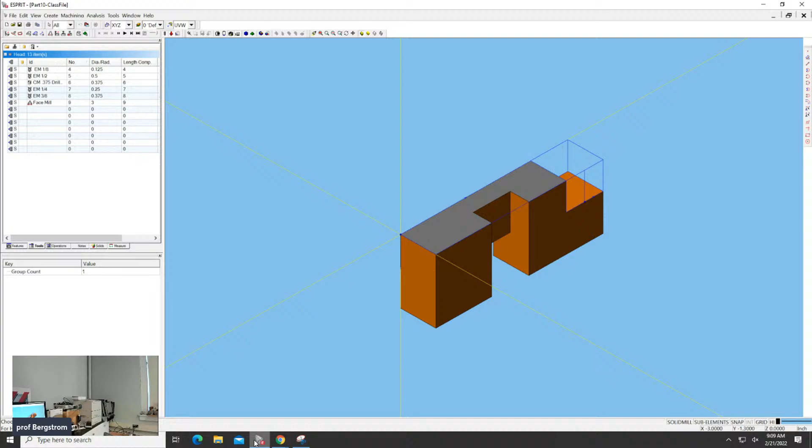So is the person who sent this file here? Oh, you are. You're in the back. Okay. With like the hood and the mask. All right. Now with just the mask, I recognize you. And once you spoke, I also knew that it was you.

All right, perfect. And so this is the ESPRIT file you sent. And you've got tools and stuff in it? Okay. I was just starting to look at it before you guys got here. So did you create stock material for this operation already? All right, so let's take a look at what you got for stock material. It's not on a different layer?

So you went to the simulations toolbar and here in solids, you created this stock. All right, so I can see the stock if I click the play button, even though there's no operations, right? So let me just go do that and double check where the stock shows up. All right, so the stock shows up visibly where the part is. So let me just double check and look at the definition.

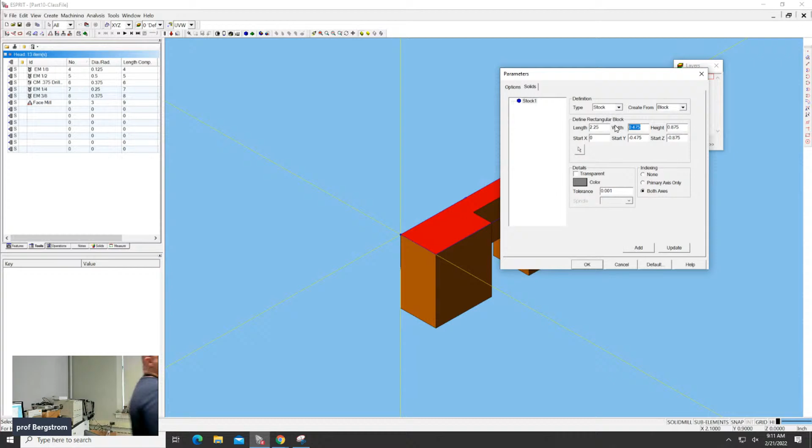So you made a 2.25 by 0.475. So do you have that piece of stock that you've measured? Was that thickness? But did you measure it? Do you know that it's that thickness? You do. Okay.

The first thing with doing the stock material is you need to define the stock material in the CAM software with exactly the same size and shape as it actually is going to be in the machine. That lets you do the programming and it lets you see if it's going to crash when it's doing the operations, right? All right, so it's 0.475 in width and 0.875 tall. Okay, and you shifted it down minus 0.875.

So the top of the stock is right here at the same plane where that red plane is, right? Which means we could do a facing operation there that would maybe touch the surface, maybe not touch the surface. It depends on how well we set the work offset, how well we set the tool offset, and how level the part was in the fixture. Does that make sense?

So often what I'll do is I will purposefully have the stock be a little bit taller than the workpiece, because when we set up the machine, it's easy to probe the top surface of the stock. And so the easiest way to do that is to actually shift the workpiece down a little bit in Z in the CAM software so that the stock is aligned with the top, and we're shifted down in Z a little bit.

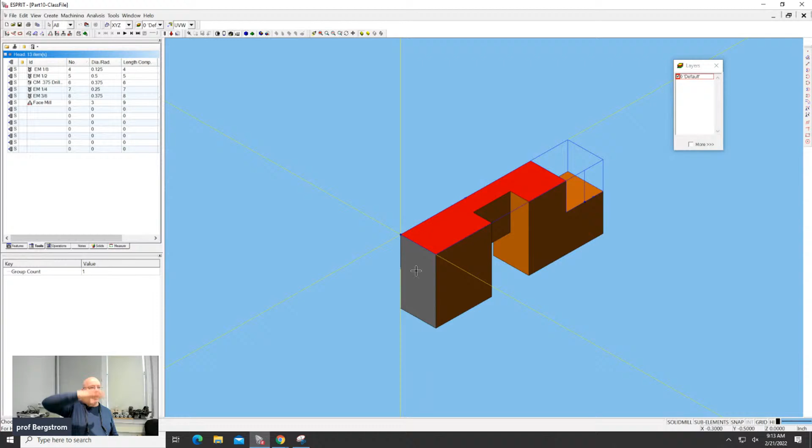The other thing is this plane right here. That's going to be lined up with that edge of the stock material also, right? So if we shift the workpiece down and right a little bit, is the stock material wider than the workpiece? What's the dimension from here to here? Do you know?

All right, so if we don't know what that dimension is, we can actually pretty easily get it. The first thing I'll do is quickly turn off sub-elements. And I've got highlight turned on. And now if I click this, it selects the whole part. Once I've got the part selected, I'm going to right click and say copy. Copy in ESPRIT doesn't just copy, it does a lot of different things. And what I want to use is this smash command, which lets me make a wireframe on the outside edges of the part. So it creates geometry features on the part.

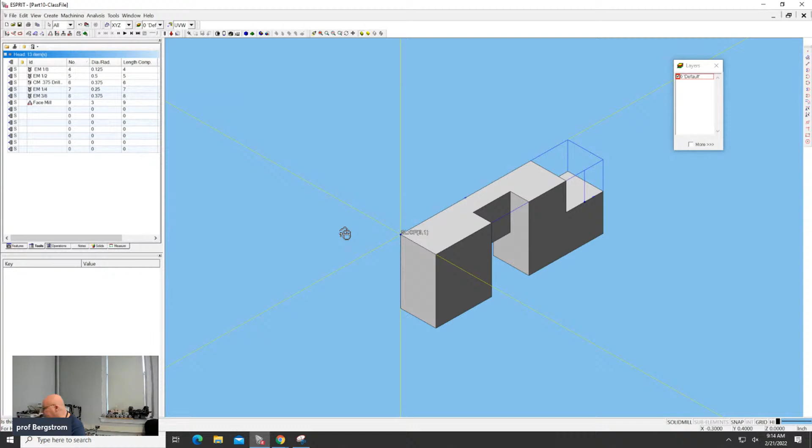And so if I do that, now if I have highlight selected, I can click here and it says, hey, is that the feature you wanted to select? And it's calling this line S1. If I left click, I say, yeah, that's the feature I want. If I didn't want that feature, if I right click, it gives me the next option that it found, which is the solid. And since I don't want the solid, I'm going to right click again, just right click until everything goes away there. And then I'm going to go here to that S1.

And so when I have it selected, if I've got the properties window open here, and you get that by going view, properties, when I select the line, I can see the length is 0.475. So it's exactly the same width as the stock material. There's nothing I can do with the position of the part front to back in this view. But I can move it down and I can move it to the right. So we're going to machine on both edges of it, I think. How long is your part?

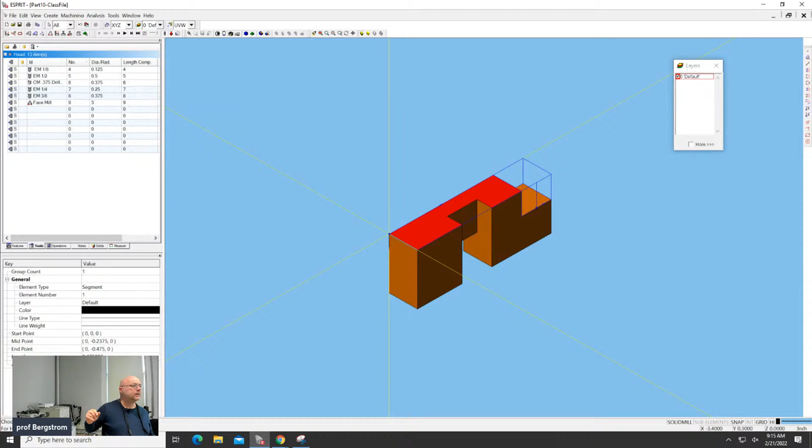Okay. So the other thing we can do here is we could measure, or we can, so we know that this line right here is on the 0, right? It's lined up with the z-axis. So we select this line right here. We can see what the x coordinate is. So x, y, z of either the start or the end point, right? So it's 2.25. I don't remember what your stock definition was.

So let's go back to that. So your stock is 2.25, .475, .875 tall. Cancel. That length is .875. So the part just barely fits in the stock material. So I guess we don't have to move anything because it just barely fits. And if that's the case,

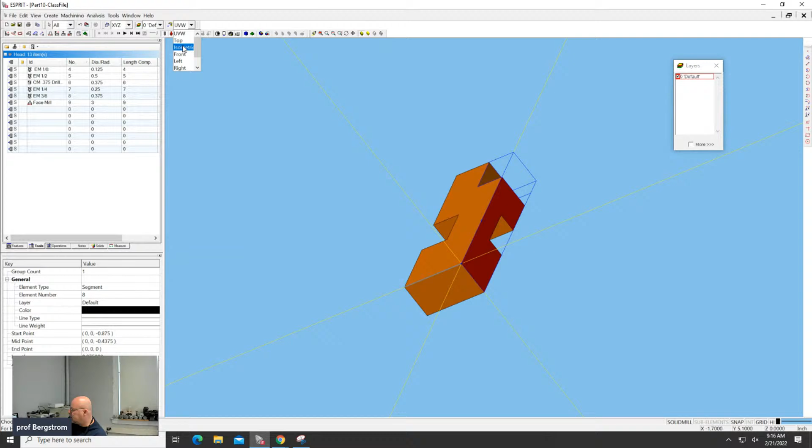then the only feature that we can make from this orientation with an end mill is this little shelf over here, right? So if I turn on sub elements here, we want to make that surface, right? From this orientation. And we want to make that surface from this orientation, because the tool could make a pass across there and do that. And so to do that, we really just need a contour path.

Go back to my isometric because it's easier to view for me. And so what I really want is a chain that goes from this corner over here to this corner over here. I can do that by going to the create features toolbar, and do a manual chain. And select this point here and go to this point here.

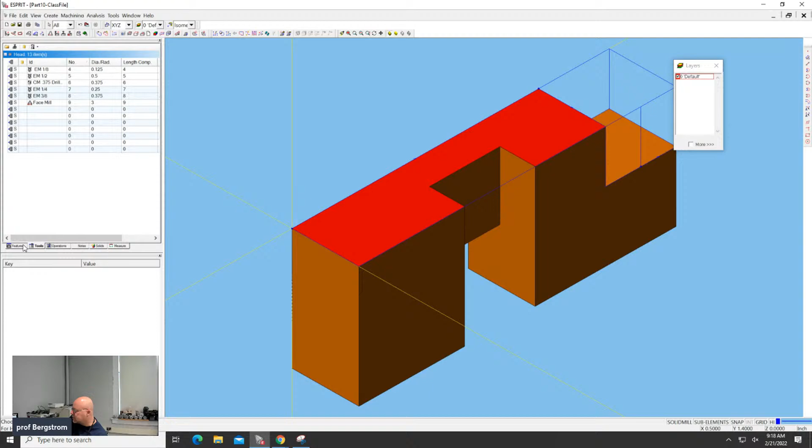Escape. I think I hit auto chain. I want to make a manual chain. Go from this point here to that point there. And then I got to tell it I'm done selecting points, so I'm going to hit the stop button here. And so we go to the features view. That was this chain that I just created. You can see that it's highlighted here. I'm going to go ahead and delete the other two chains.

So this chain is here. And if we zoom in, you can see there's an arrow on the chain that points from here to here, which is the direction I selected it. And that arrow is important because it tells us the direction the tool's going to go as it does that contour. And we want to do what we call a climb milling operation.

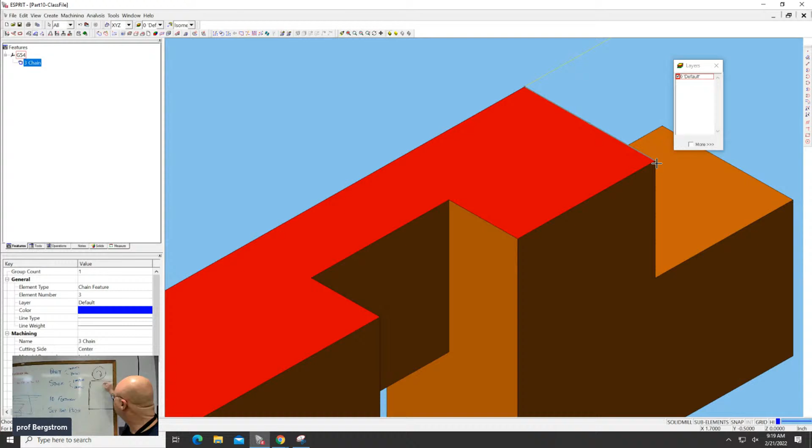And so when we do a climb milling operation, if we had the edge of the part here, in the top-down view, and we've got our tool here, the tool is rotating clockwise. And so the rotation of the tool will tend to make it roll along that surface that we want to make. And so this edge of the tool, as it climbs along that surface, is going to make that surface here. And then the bottom of the tool is going to make this surface down here, right? Okay.

So we've got our chain. I guess you started with one of our templates because you've got all the tools defined here. So we're going to use probably this 3/8 end mill to make that feature there. Now, all we want to do is select the chain. I go to my solid mill traditional toolbar. I don't want to do facing, don't want to do pocketing. I want to do a contour. So I select contouring.

And then if I go to general here, the first thing you need to do is choose the tool when you're going to do an operation. So I'm going to pick that 3/8 inch end mill. And it wants us to select the feed and speed for the tool. So the speed is either RPM or surface feet per minute. The XY feed rate is how fast it's going to move in X and Y. The Z feed rate is how fast it's going to move when it moves in Z.

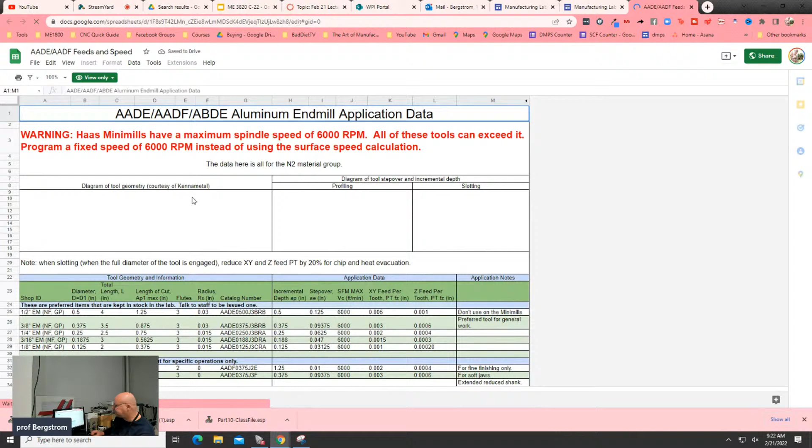We have a 3/8 end mill. So I'm going to go down to 3/8 here, and we don't need extra long or anything like that. So just the standard 3/8 end mill that we have here. And first it tells us what's the maximum diameter we could have with this tool engaged in the material, which is equal to the diameter of the tool. So that means that the tool can fully slot in the material. It tells us the total length of the tool, this AP1 max. It's how deep can the tool be in the material for each cutting pass.

And so what's it say? We want to go 0.875, so that's like half of 3/8. No. I don't know, 0.875. That's more than 3/8. Oh, yeah, AP1 max. Sorry, that's the total depth that it can go. AP1 is the depth that we want it to go, which is probably 3/8. It's incremental depth, AP1. There we go. Step over AE in inches. So we tell you that it can fully slot, but when you're using it, you should step over less.

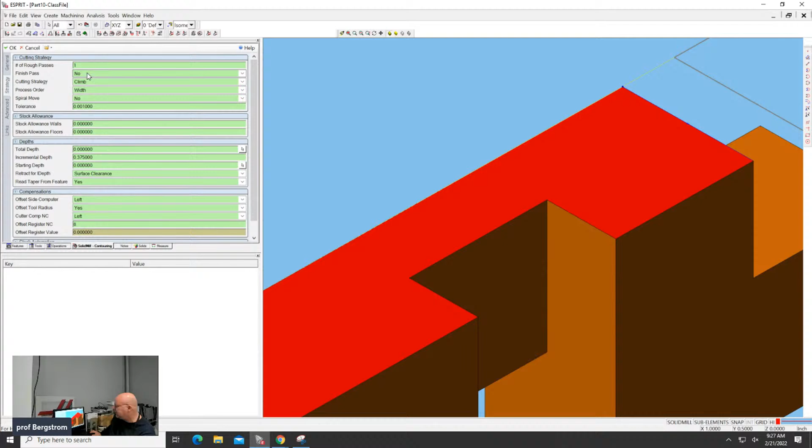This strategy here, so we're just cutting on one side of the part, right? So for strategy, we'll do climb milling. Number of passes. So over here, you remember it said that we want to step over this 0.09375. So I could take the total distance it needs to go and divide it by 0.09375 and calculate the number of passes I need to make. But I'm lazy, as all programmers are lazy. So I'm not going to do that. Instead, I'm going to just pick some number that I think is bigger than the number that I need. I don't know, 25.

And then I'm going to scroll down here and I'm going to say use stock automation trim. And when I scroll back up, it's going to say process order width. That's fine. Step over distance. So I'm going to do this 0.09375, which I got from the chart, which is 25% of the tool diameter. Stock allowance on the walls. We don't need to stay off the walls. If we use a positive number, it would keep the tool away from the surface. If we use a negative number, it would cut the tool into the surface and gouge it.

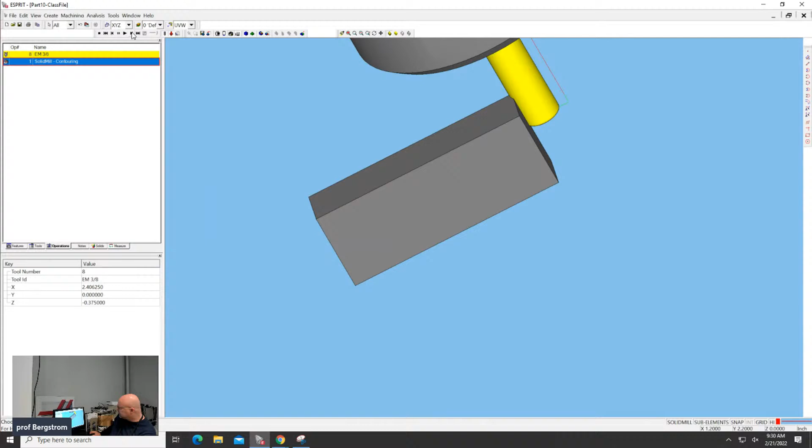And so what it's going to do now, if we simulate, so I'll single step through the simulation. So the tool's going to come in, it's going to take off that 09375, take off another one, take off another one, till it's done. When it's done like this, and so I think this is the part you're having trouble with mostly, the next thing we need to do is we need to say, hey, we're done with this operation.

And so what I'm going to do now is I'm going to click the save button. So it's going to save the file with all the operations and chains and everything that I created. Then I'm going to click the save button again because I'm not certain that I clicked it the first time. Then I'll typically click it a third time just in case I didn't click it the first 2 times. So now I'm pretty sure that I saved the file.

I'm going to go to my simulation toolbar. And I want to do save stock to file. So it's this one here. And so this is op1 finished, right? But in reality, it's the stock material for op2. So I'm going to call it op2 stock. And save it.

So I'll hit escape, get out of the simulation thing, hit stop to get out of simulation. So now I'm here. I got my tool path. I'm going to click save one more time just in case I didn't do it the last 3 times. And then I'm going to do file open. I'm going to make sure merge is selected. And I'm going to find the op2 stock that I saved today.

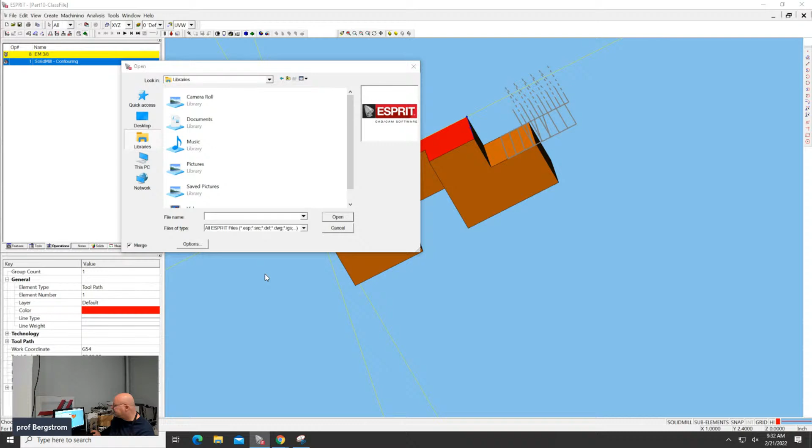Where did I save it? Quick access. Documents. Downloads. I don't see op2 stock here. Library. You know what? I don't know where I saved it. I'm going to run the simulation again. I'm going to do save stock to file. And I'm going to put it in the downloads folder because then I'll be able to find it. Op2 stock. Save.

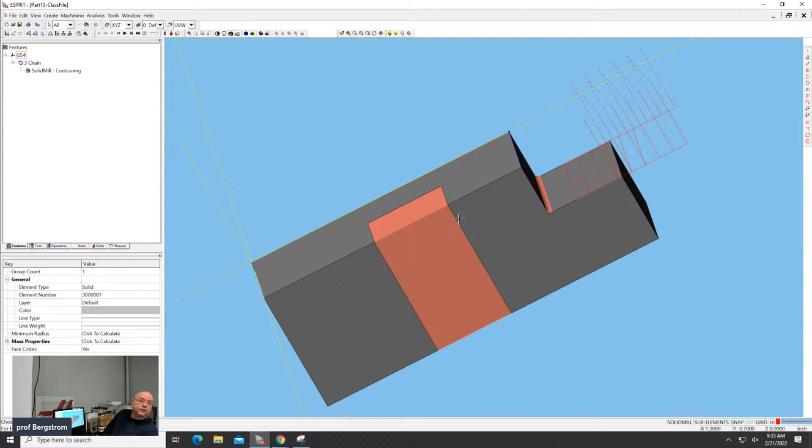Now I'm going to hit stop. File open. Op2 stock. I want to make sure merge is selected. And so now I just loaded in the stock that will be the part that you use for the next operation. We already saved it like 4 or 5 times, so I know that I saved the file that can create that. So I'm going to do file, save as. I'm going to call it whatever you called it before, op 2.

And so now it's got the stock material, it's got the part, it's in the wrong orientation, right? Because which operation do you want to do next? This one right here that removes this bit? Yeah. So if we do that one next, then we need to have this surface facing up, right? So the first thing I'm going to do before I rotate anything, we've already made the first operation. I'm going to delete this chain, and it will delete the cutting operation that was associated with it. Basically, I'm going to delete everything I don't need for the next operation.

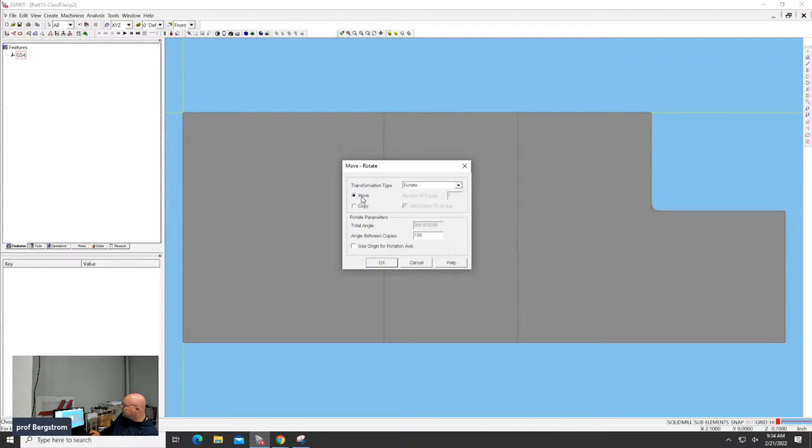Then I'm going to select everything that's left over. Maybe I'll go to the front view to make sure I get everything. I'm going to right click and move. I'm going to rotate. And make sure that it does not say use origin for rotation axis. And I'm going to make sure it says move, not copy. And I'm going to click OK. And it's going to ask me down here to select the center of rotation. I'm going to click that X axis.

And I'll go back to my isometric view because it's easier to see what's going on. Was that the direction we wanted to flip it? It wasn't the direction we intended, right? But it'll work. We can cut this one. So we'll do this side next. All right. So we're in this orientation. You want to remove this material here. The part's already exactly the right size, so you don't need to do any facing or contouring around the outside.

So to remove this material here, probably what I want to do is I want to make an open pocket. So to do that, I'm going to go to the Create Features toolbar again. And it's so easy to create a manual chain to 4 different points. So I'm going to just hit the manual chain.

Select this first endpoint. And so I'm there. Go to this endpoint. I'm there. Go to this endpoint. Go to this one. And go back here. And so now I've made a box that sort of represents that whole thing.

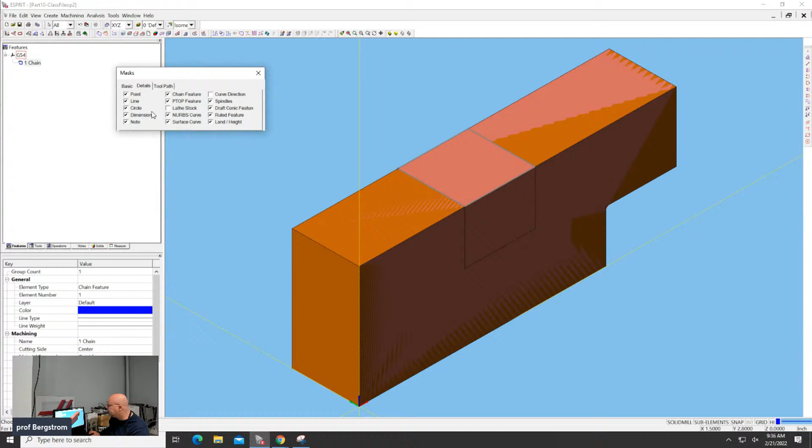In fact, I could have just the box showing if I go to View Masks. And I say, I don't want to see the STL model. That's the thing we loaded in, right? And I can say, I don't want to see the solid model. And so now I see all that geometry. And I see my box.

And that's kind of a pain too. So let me turn off geometry. And so now I just see that box. What I'd really like for the tool to do is to be able to go back and forth through this box and not be bounded by this edge here or this edge over here.

And so to do that, I'm going to make sure that I have highlight and sub elements turned on. And I'm going to select this chain, and it's going to say, hey, did you mean the chain that you clicked on? I'm going to say, no, I didn't mean that chain. It's going to say, hey, did you mean this element of the chain that you clicked on? And I'm going to say, yes, I meant that. So left click says yes, right click says no. So I want that element of the chain.

And we go back to properties, attributes, and say open edge, true. And then just click anywhere it accepts that. When it makes a dashed line like that, it means that it knows that it's a chain that goes all the way around, but that edge is supposed to be open. I'll repeat the process over here. True. And so now it's bounded on this side. It's bounded on this side, but it's open on those 2 edges.

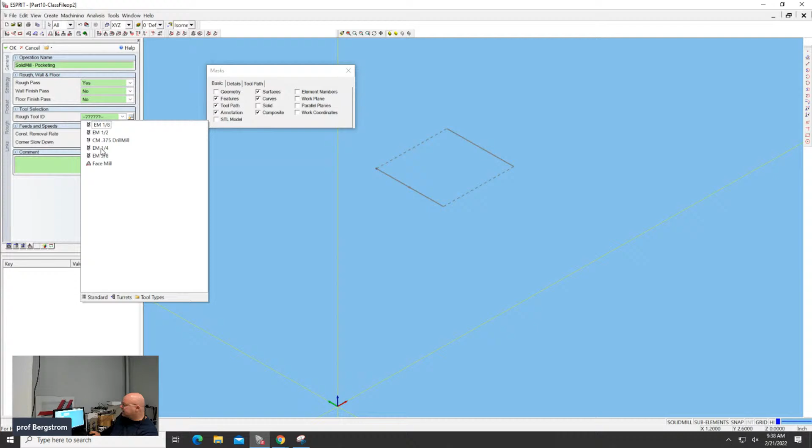We'll select our chain. Go to our solid mill traditional. And we're going to select a pocketing operation. Do you know how wide that part is? It's probably 375. Everything looks sort of the same. I'm going to go ahead and select the 1/4 inch end mill instead of the 375 end mill because it makes this explanation more interesting. So we've selected that 1/4 inch end mill.

Oh, 475. All right, so I can pick the 375 end mill, the same one we used before. The nice thing about picking the same one we used before is we remember what the feed, speed and depth of cut are probably, right? If not, we still have that tab open. But so general, we want to do a roughing pass.

I'm going to say no to the floor finish and the wall finish pass. What saying yes lets you do is, actually, I think it lets you pick a different tool and a feed, speed, depth of cut. But hey, this is not my project, it's your project. So I'm going to say no so I only have to program one thing. And I suggest that you guys only say no or only do one thing also.

Unless you find out when you make it that you don't get the surface finish that you want, and then you could adjust those things. But it's a pretty simple part here. So I'm going to say just do the roughing pass. Strategy. So there's all kinds of choices here. It's beyond the scope of this explanation to go into all the different choices.

But I like concentric out because it seems to me it starts in the middle and it moves towards the edges. And I feel like that's good. So I'm going to use concentric out. This morph move you can set to yes or no. Spiral you can set to yes or no for this operation. Doesn't really matter.

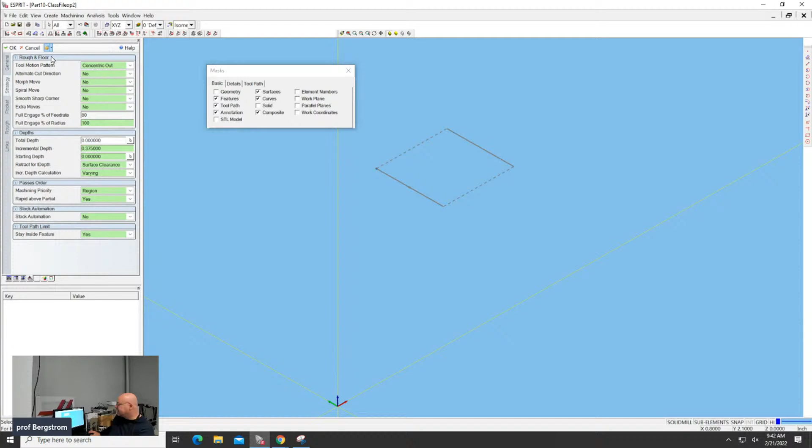Total depth. What's the total depth we need to cut to? Do you remember? I don't remember either. So let me turn the geometry back on. And if I rotate it a little bit, I can see where that shelf is. So I'll go ahead and select total depth. I want to go to, now I'm all confused. It's like one of those Escher drawings, right? I want to go to that point for my depth.

Total depth, incremental depth, starting depth. What was our incremental depth for this tool? Incremental depth is 0.375. Starting depth 0. I'm going to say stock automation, yes, again. We probably don't need it for this operation. Toolpath, stay inside feature. I'm going to just leave that alone.

All right, pocket. Are there any islands in your pocket? Any bits of material you want to leave in the middle? The answer is no. I've seen the part, but if there was something sticking up in the middle and you wanted to tell ESPRIT, don't cut that, that's where you'd click here and then you'd go select something over there. Read taper from feature is fine because there is no taper. Open edge offset. So how far past the part do you want it to start and stop? So I usually use this 110%.

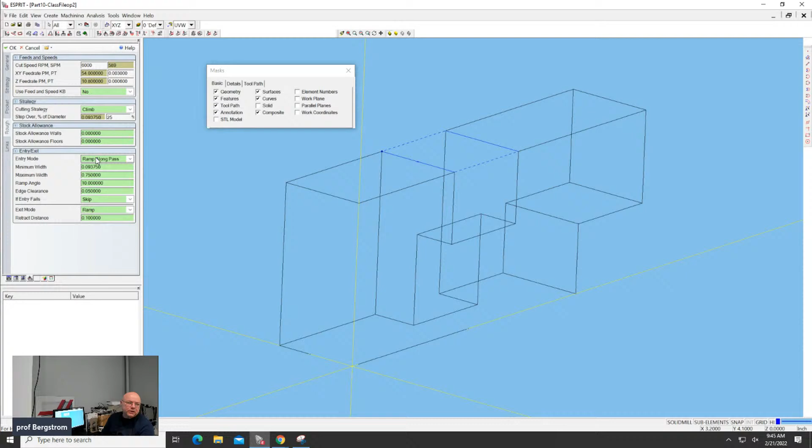Entry mode, because we're doing an open pocketing operation, we actually don't care what the entry mode says because it's going to come down outside the part and feed into the part. But if it was a regular pocketing operation, we would either want to use ramp along pass or ramp contained. We would want the tool to always be moving sideways when it's feeding down, never just feeding down. But we don't really care because it's an open pocket.

Links. This is really mostly important if you have multiple operations in a row that use the same tool. Since this program is only going to have one operation, we don't care what that says either. I'll click OK. ESPRIT could not find the area of the part to cut. Verify stock definition. Okay. So the problem is we loaded the stock file in, right? We've got it there. It's our STL model. That's our stock. We never told ESPRIT that was the stock.

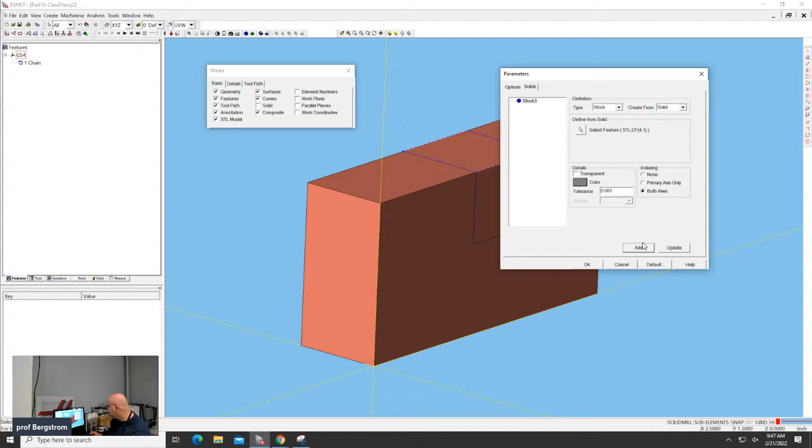So before we can have this operation, we have to actually go to the simulations bar, go to the simulation parameters, tell it the stock, and delete this one, the stock from solid. Select the feature, select the solid, add. Okay. Now, go to our operation, our pocketing operation. Select the chain. Go to our pocketing operation. If we're in luck, it remembers all the things that we put in. Let's just double check.

Nope, didn't remember anything. So 3/8 inch tool. Cut speed. Oh, it's a contour, cancel. Picked the wrong one. Select the chain and create a pocket. And 3/8 end mill. Concentric out. None of that stuff matters. 80%. Total depth, I forget. Click there. Starting depth 0. Stock automation. Trim. Stay inside feature, sure. Pocket. Nothing special on the pocket.

Rough. 6,000 RPM. 0.003. 0.0006. 25%. I don't care what this stuff is. Links, I don't care. Okay. And now we can simulate. And so now we've got two features on our part. Save, save, save. I'm a proponent of saving frequently.

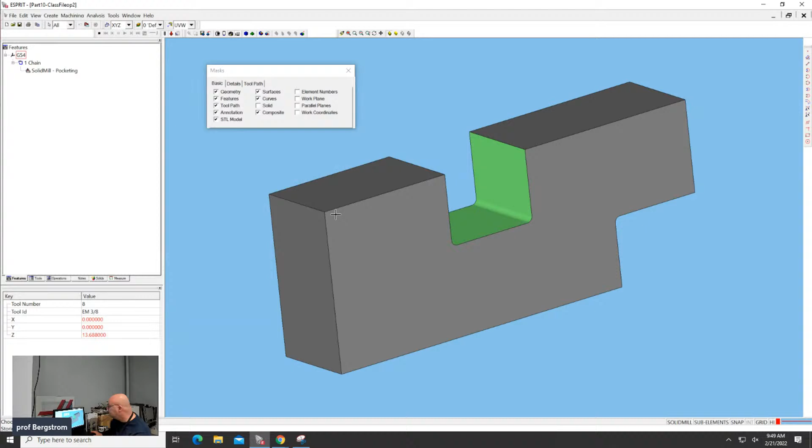Save the stock material to file. Op 3 stock. And it's in downloads. Okay, save. Yeah, sure. And file, save as. Op 3. Save. Hit stop. All right, so we want to delete this for Op 3. Delete this stock for Op 3.

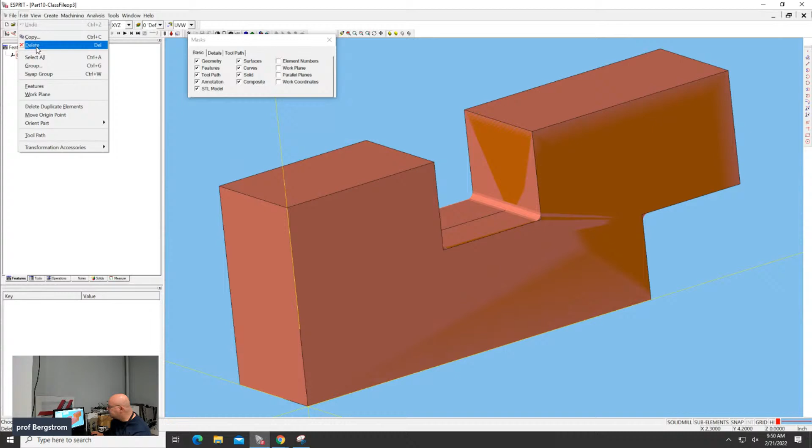File, open, merge, Op 3 stock. We've got that here. I'm going to remember to go ahead and set that as the stock now. So I'll go to simulation parameters, delete the old stock, new stock from solid. That's the one, add, okay. Turn on my solid. And I'm going to do edit, select all. Copy, rotate, move, 90, okay.

And put it in the right operation. And then just repeat those same, right? You're going to create this open chain the same way we did the last one. And you're going to have that same operation to remove this material in here. So actually, because you want to make the same operation, let's go ahead and make the chain first.

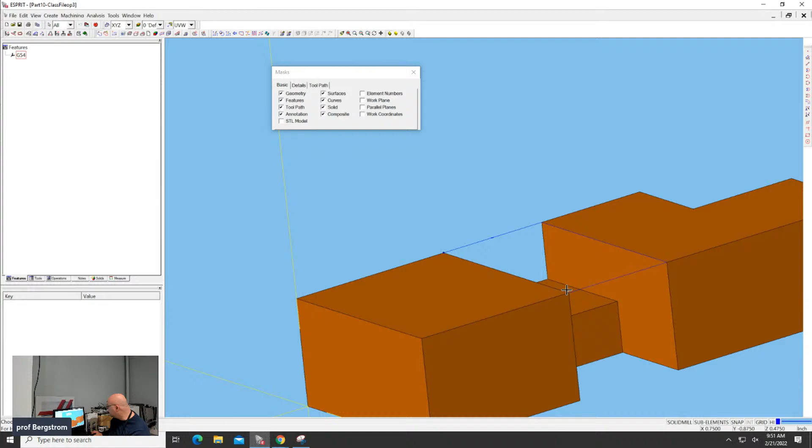So my manual chain, I'm going to do this one. Nope. Endpoint. Manual chain. This point, this point, this point, this point, and my endpoint. I want those two edges to be open. So select the chain, say nope. Yes, I want that one.

And then I'm going to hold down control. I'm going to select the chain. I'm going to say nope. I'm going to say yes, that one. And so I've got both of those selected. I can do attribute open edge true. And that makes both of those edges open. I'm going to do file, save.

Then I'm going to go file, and I'm going to reopen the last one we did, op 2, right? I'm going to open up op 2. I'm going to go to my operation. I'm going to right-click, file, save process. I'm just going to call it temp, save. I'm going to go back to the one I'm working on, op 3.

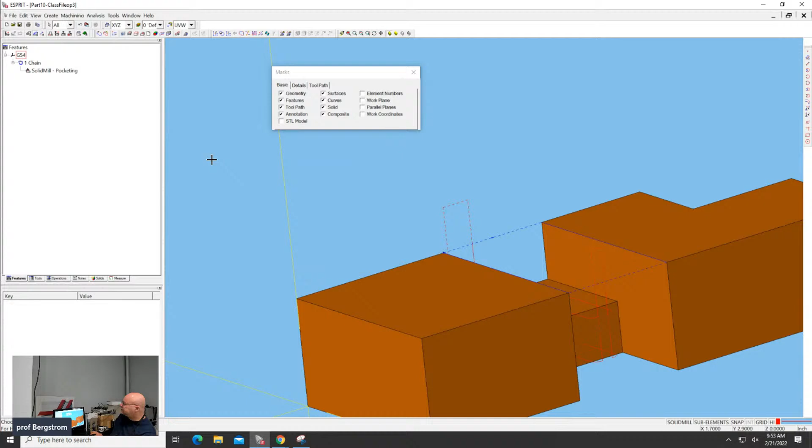I'm going to select the chain, right-click, file, open. Temp is the one I just saved. And so it copied all the parameters we set for the last one. We can simulate and see that it makes that cut too deep, right?

So all we do is go back to the operation, hit stop to get out of simulation, go back to the operation, find the depth part in strategy, total depth, and select that height instead. And so then it makes the feature like that. And then click save, save, save, and then we're done. So then we've programmed that part. It all used the one tool, take the stock material, flip it over, flip it over, flip it over.

Was that good? Has anybody else emailed me a file to look at? I did. I'm all set. Well, I'm not going to look at your file. That was the last time, right? Or Hayden fixed it? Yeah. Anybody else email me a file to look at? You can ask, but I didn't hear you, so let me walk over here.

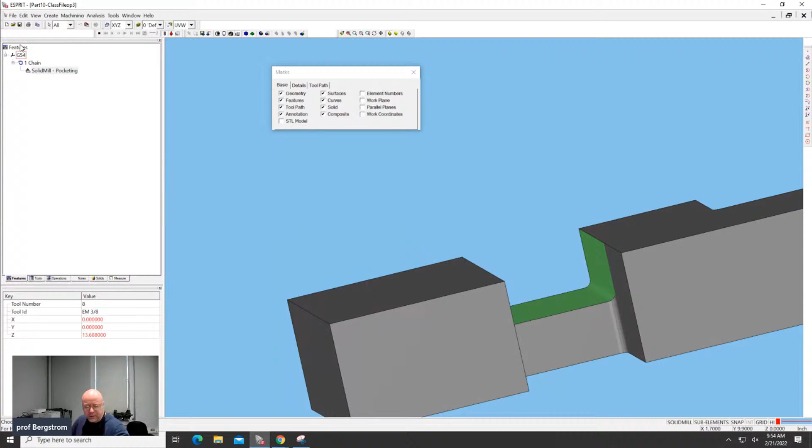Like it's working now and stuff, but how come initially it was changing the axis that the chain was in? That sounds so weird. No, I know. So yeah, because we talked about this last week, and you were having some trouble making the chains so that they were in the orientation you wanted them to be. Yeah. So let me, I'm going to go back to op 2.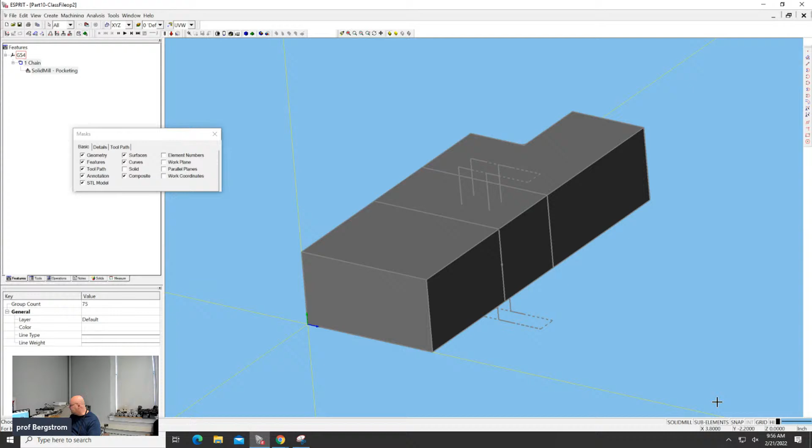So if I'm here at op 2, and I've got the op 2 program done, and I want to make the op 3 program. What we do a lot of times is instead of selecting everything and doing copy rotate, I'm in the isometric view right here. If I just manually rotate it around like this, and let's say I wanted to do a facing operation on this side. We don't need to for your part, but let's say we want to do a facing operation right here. So it'd be pretty easy to select this face, highlight sub-elements,

maybe. Turn the solid back on and turn the STL off. There we go. So it would be pretty easy to select a face like this, if I remember what I'm doing. So I want that face there. Let's say I want to do a facing operation. I can go to auto chains. Let's say we'll go to auto chain. We'll just make a chain that goes around it.

So I've got my manual chain here from this corner to this corner to that corner, over to here, over to here, and over to here. All right, so we've made a chain that went around the part. We've got the part facing in the orientation that looks good to us. We select that chain and we say, let's make a facing operation. And let's use the face mill. I'm not going to bother to look up the feed, speed, depth of cut here. I'll just leave them zeros for now.

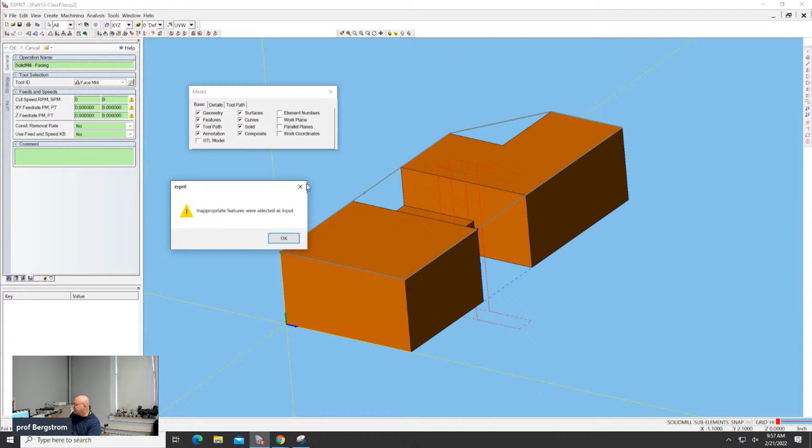But if I click OK, it's going to say inappropriate features were selected as input. Sometimes, if you're doing a turned part in the lathe, it's going to say need another axis of rotation. But when I see that message, the first thing I always do is go here and click isometric. And then I realize that although I rotated my view of the part, I didn't actually rotate the part. So the plane that I drew in is not facing the direction the tool can reach.

And so I think that's what you were seeing when you were trying to do it before. You were rotating your view, but not rotating the part. That's my guess. Without watching you do it, that's my guess as to what was wrong. So that's that common newbie mistake. And the reason I can so quickly recognize said newbie mistakes is because I've made all of them.

Anybody else sent a file that they want to go over?

Anybody have a specific question then of something they want to go through? We look at like mill turn setup. Mill turn setup in ESPRIT or mill turn setup on the machine? In this, okay. Can you send me the file you want to turn? And

Yeah, and give me like a 3-minute pause because I've been up since 20 to 4 this morning, and this is not my first cup of coffee. But I will. The microphone here.

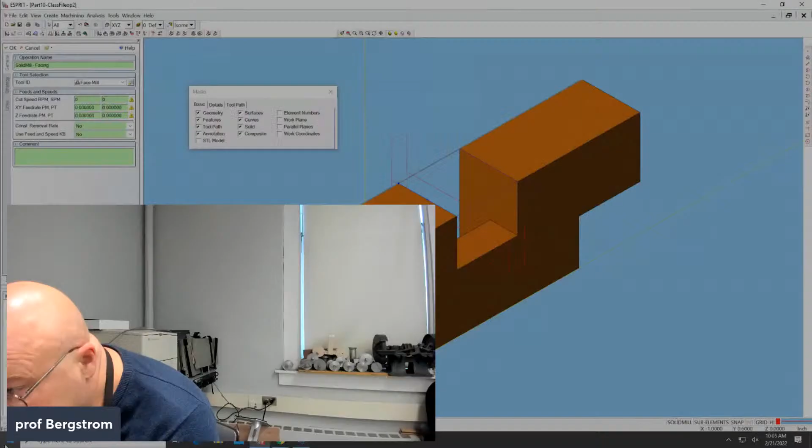ESPRIT. All right, now I can unfreeze. Unfreeze. And reshare. All right, file open. I don't care. Cancel. File open. This is the one? Yep. Screw 62.

So I have a funny story about your file name. What's that? So back in the early days of the internet, I worked in the surface metrology lab, which was upstairs in this building. And we transferred a lot of data sets with a lot of data points in them. And there was a BME student, Melissa, who came to work in the lab to do some research. They were looking at the surface texture on bone screws to study bony ingrowth. So they would have bone screws with different textures, and then they would see how the bones grow into them. And I don't know how the BME research side of it worked, but I do know that we were measuring bone screws. And she named her files Melissa Screw 1 and so on, because yours is like Screw 62 here.

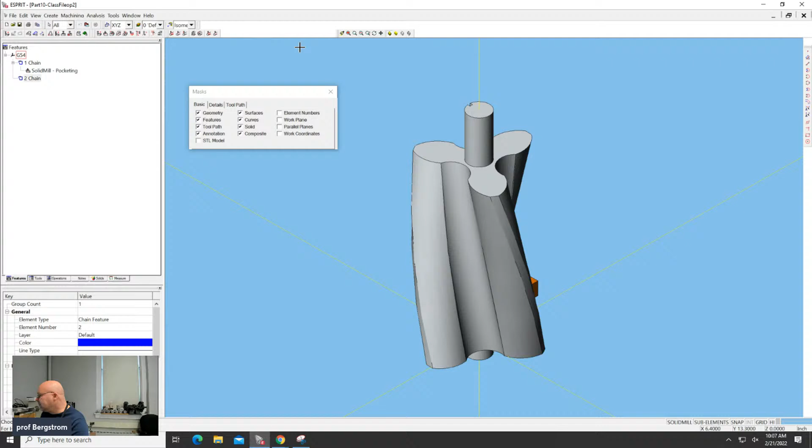All right. So let's see. Because I merged it into my existing file. I don't want to do that. I'm going to do file open again because I don't really want to cut your what. So is it really an impeller? It's a screw. I mean, I heard you guys refer to it as a screw. I would have thought it was like an impeller. The purpose is to compress air, right? Yeah. I guess it's like a screw compressor kind of a screw. Is it an impeller? No, I guess an impeller I think is different.

Is it the opposite of a turbine? Yeah. From the center. The screw in a screw compressor might actually be an impeller. I don't know. Like if it was a pump, if it was pumping water or something, I would call it an impeller. And I've seen plenty of pump impellers that had that shape, with like rotary pumps. But when we're compressing air, we call it a screw. That's right, same thing like a rotary screw compressor for air, which there's one right on the other side of that wall. Yeah, but we're not going to cut it out of that piece of stock material, right? No. Okay. So I'm going to just go ahead and file new. No, I don't want to save any changes.

I'll create a blank document. I typically don't like to start with a blank document because it doesn't know anything, right? So we have to set up a lot of things. But I think for the sake of the tutorial here in the class, it makes sense to go through setting up some of those things too.

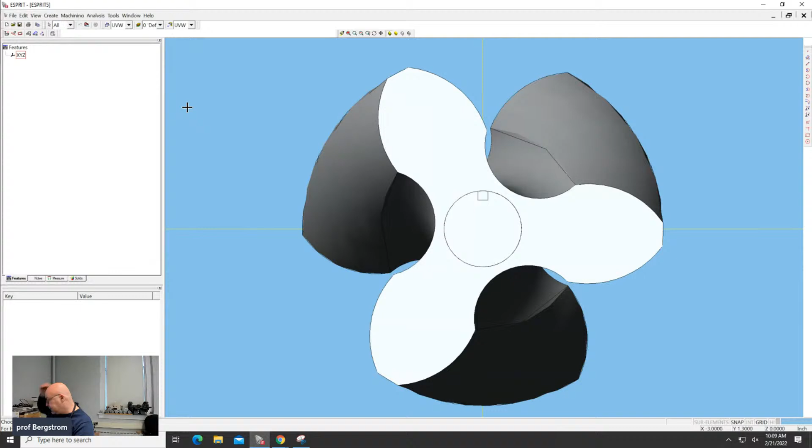So now file, open, downloads, quick access, downloads, screw 62, and isometric. Okay. So the first thing we want to do is orient it such that the lathe could touch it. And so I'm going to select it, copy, rotate 90 degrees. Okay. And use this axis. Yeah, it doesn't seem correct.

Control Z. I'm going to stick with my 90, because I'm going to show you how to correct when you did the wrong 90. You could also do negative 90, which would be 270. But I never remember which direction to go. And it's not that important to me as a person to have remembered that.

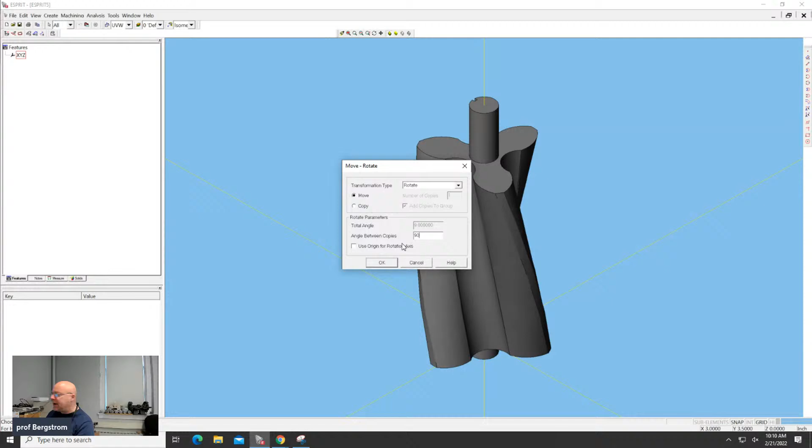Because when I say 90, okay, select this axis. Oh shit, that's not the direction I wanted to point it. I can either undo and then go to negative 90, or I can just right click, copy, 180, and that's going to work. Conveniently for us, the designer at least had the center lined up with 0. But if not, we could figure out what that center point was, and we could shift it around, and we could get it lined up so it's on the axis.

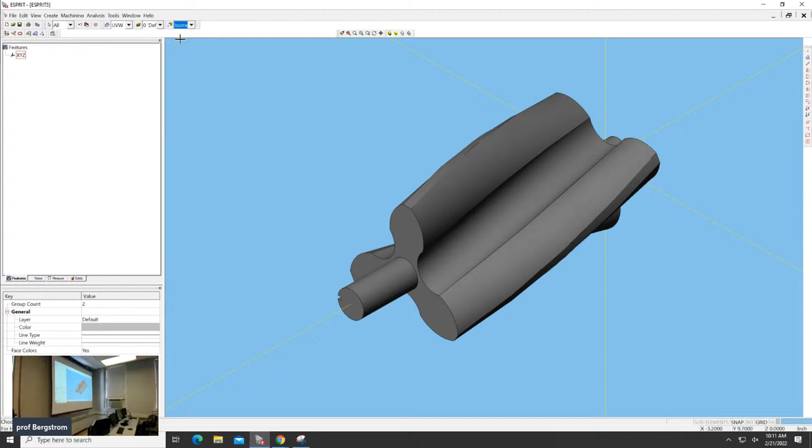So we've got this. I'm going to go back to isometric, because when I go to isometric, it gives me some perception. Is it actually pointed the direction I think it is? And so in the lathe, with my fancy video work here, the spindle is over here, and it's going to hold on to the stock. If you're doing a turning operation in the lathe, the stock's going to rotate like this. So this is the Z-axis of the lathe, so that this axis right here aligns with the spindle in the lathe when we're in the isometric view. And so that's important to know how to line it up. So we're lined up like that.

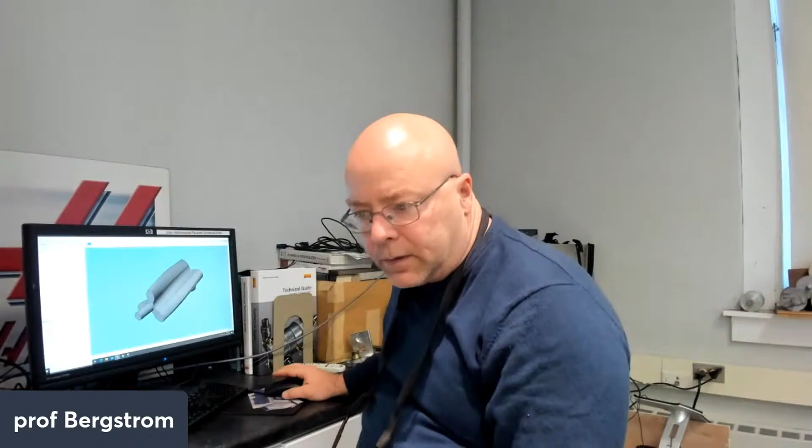And what we want to do is first we need to tell ESPRIT that we're doing a turning operation or a mill turn operation, right? So switch to solid turn. So when we first open up, and not everybody gets this toolbar in the same place, so I'll pull it out here. It's the smart toolbar. And I like to keep the smart toolbar on the second row of toolbars all the way to the left. When I set up where my toolbars are, I always put it at this location. Well, except for this instance, right?

I'm not sure exactly what it is, but I have had some trouble aligning toolbars with the computers at WPI. And I think it's because we don't actually have the video driver for the monitor installed. I think we just have some generic video driver installed. That's what I think the problem is. But that way I can blame the IT guys. Yeah. Right? Because if you can't blame the IT guys, you have to blame the software developer. And they've been really generous with us. When they gave us the software in 2005, the book value was like $3.5 million. And they update the license every year at no cost with the full suite of things. It's like $35,000 a seat or something like that. So I try to blame our IT before I blame the software developers. And in my defense, IT won't return my phone calls, so it must be their fault. But hey, if you guys are monitoring the stream, I didn't actually say that. I got hacked. It was hijacked.

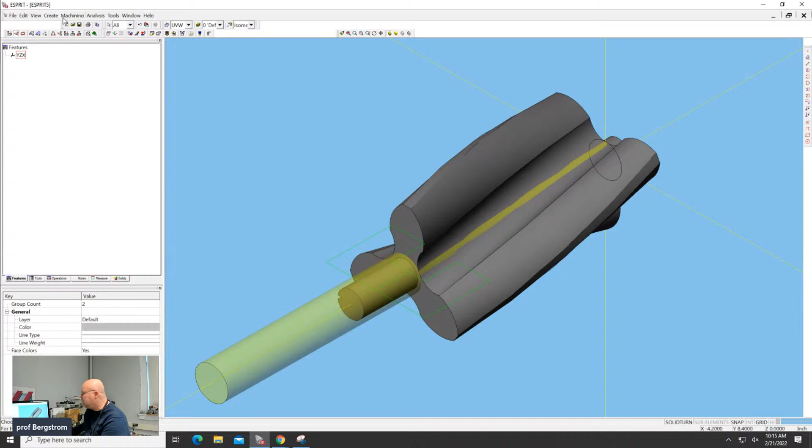All right, so we're here. What we want to do is hit this solid turn. It tells ESPRIT that we're going to make a turned part instead of a milled part. And then we go to our common machine settings, which is this one, common machining. On the toolbar, we can also go to machining, common machining. Now we're going to go to machine setup. So with a lathe part, you need to do this. You don't actually have to say what the machine name is, but it's nice.

So we're going to use the ST30 SSY. I'm going to leave all that stuff alone for now. Assembly and NC output. So the first thing I want to do here is give it a program name. Screw 62. Just so when I create the code, it has a program name. And I'm going to give it a program number so that it's not 0. That's too many digits. That looks pretty good.

Sometimes I try to use sequential program numbers if I know I'm going to do that. Sometimes, like ME1800 programs, I'll start with 1800. But it just needs to be a 4-digit number.

If I go back to general, this is actually what I wanted to change. So the bar, so it's going to come out of a bar. You could make stuff out of a tube or a casting. If you have a casting, then you need to have a solid model that defines what the casting looks like. We're going to cut it out of a bar because it's solid.

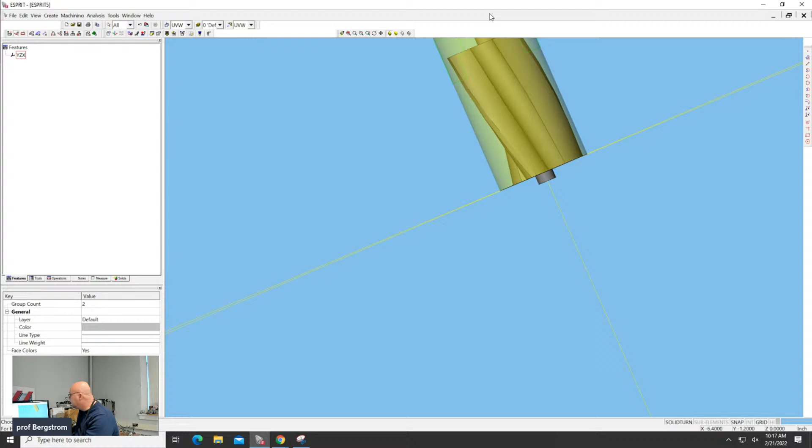Now you'll notice that your part sticks out from the stock material when I did that. So what I usually do to fix that, isometric, except I can't see the part that sticks out in isometric view, right? What I'll usually do is select the stock, copy. I'm going to move it. I'm going to translate,

move X, Y, Z. Now, in the lathe, this lines up with the Z-axis, right? Yeah, but when we're viewing it in ESPRIT, it's still the X-axis for us. That's in the manual, so it's a feature, not a bug.

So we're going to move it in X, negative, I don't know. How much is that little nib that sticks out? Ish. So let's move it 0.75. Negative point, I don't know if I did the decimal place. I did, okay. What do you mean incomplete? Oh, because I didn't tell it 0 in Z.

Ah, your shaft is not attached to your other piece. Yeah, well, you didn't design it that way. But that's okay. We can select this one and do the same thing. There, now we moved the whole thing. I actually knew that because I've looked at your part before, but I had forgotten until I saw it happen.

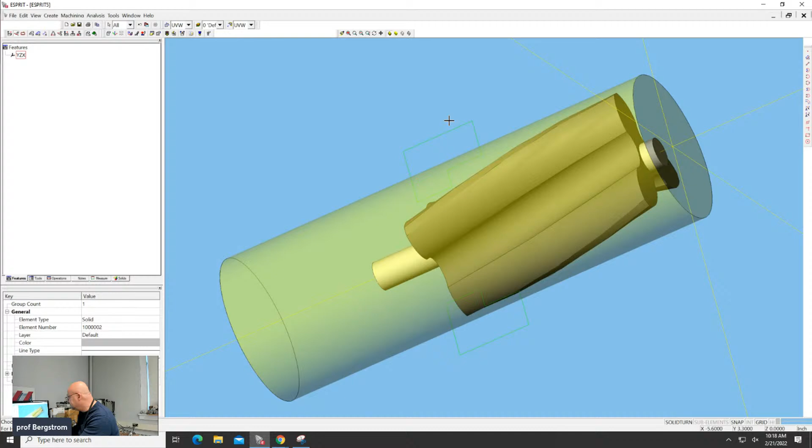All right, but now the finished part is actually inside the workpiece material. That's a good thing, right? All right, so I think what I would do first in this situation, well, so we're holding it. The chuck is over here. We want to have plenty to hold on to when we do our other operations. I would do a turning operation first to get it close to the right part profile.

What's up? Are the green shapes not representing the chucks? What are those representing? Oh yeah, that represents the chuck in the simulation. You want to fix that? Yeah. I usually ignore that because it doesn't represent the chuck in the machine tool. It represents the chuck in the simulation. And I usually ignore that right up until I click play on the simulation and it crashes, and then I fix it. But yeah, we can fix that now.

It's back here in machine settings. And we want to go to assembly. And I think we want to look at main spindle. So this -6 for the home position, that's telling us to put the chuck 6 inches. Where are we? Assembly main spindle is -6 here. It's telling us to put the chuck 6 inches from 0 over here.

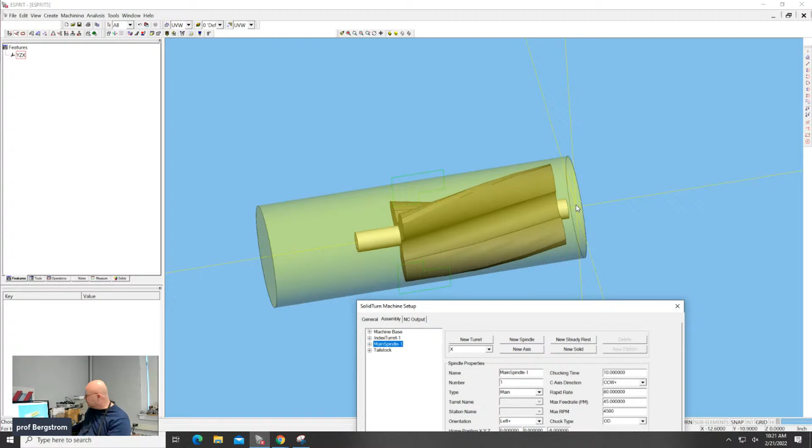And we would like to hang the stock material further out of the spindle. So what we can do is make it more negative. Is that the front face of the chuck that it's measuring from? I don't know. Could be the front face of the chuck that it's measuring from. So 12 was plenty. 12 makes it so that it's totally not going to crash into the chuck in the simulation, right? And that's all we really need for this phase of it.

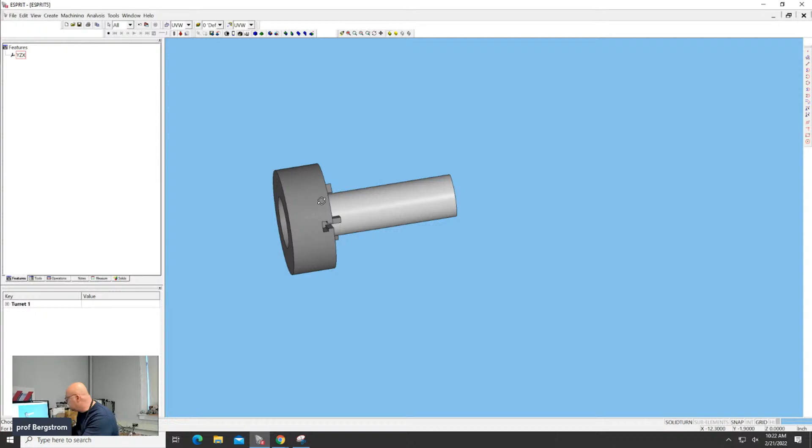It won't impact the operation in the machine tool. It's only going to impact what we visualize in the simulation. And if we talk about simulation here, there's another thing to set up. If I click play on simulation now, there's no tool paths. It's just going to draw the stock material and the turret. And so there's our chuck. Didn't even draw a turret. Oh, I have turret turned off up here.

Stock visibility, fixture visibility, table spindle visibility, head turret visibility. There we go. Yeah, so that's going to hurt when it does that, right? But it's not actually what the machine looks like. So if we wanted to, we could measure where the turret is exactly in the machine, and we could get it to simulate exactly perfectly.

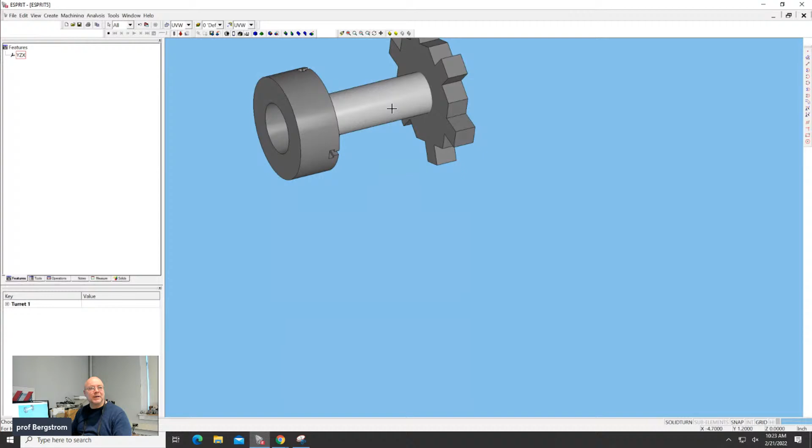And certainly if I was selling the software and I wanted to demonstrate to you that the software represents your machine, I would totally do that. If I wanted to prove to my boss that it was okay to run the program in the $150,000 machine tool, I would probably do that also. But if I wanted to prove it to myself, I would just make it look like it doesn't crash in the simulation, right? And that's my lazy excuse for not going to the machine and measuring all the stuff right now.

But what I can do is go back to simulate the settings, common machine settings, go back to assembly, index turret. For one thing, I don't think it even has the right number of tool blocks on it. Off the top of my head, I don't remember what the right number is, but you can add stations somewhere here, new station. So it only shows 7 stations, but that turret definitely has more than 7 stations. So you can add more stations. Maybe it has 12. The problem is it doesn't know where to space those stations when you add them like that.

So what you can do then is there's a button. I haven't done this since I created the templates that I would prefer to use. But tool rotation angle, there's a way to have it automatically put the stations at the right place. Maybe I click OK here. Oh, not OK. Maybe I go back to index turret. So it's not under new, configure stations. Pretty sure when you click that button, it just distributes them evenly around the turret. We can click ensure tool number matches station number. That's pretty good. It makes it harder to screw up. But we got 12 stations on there.

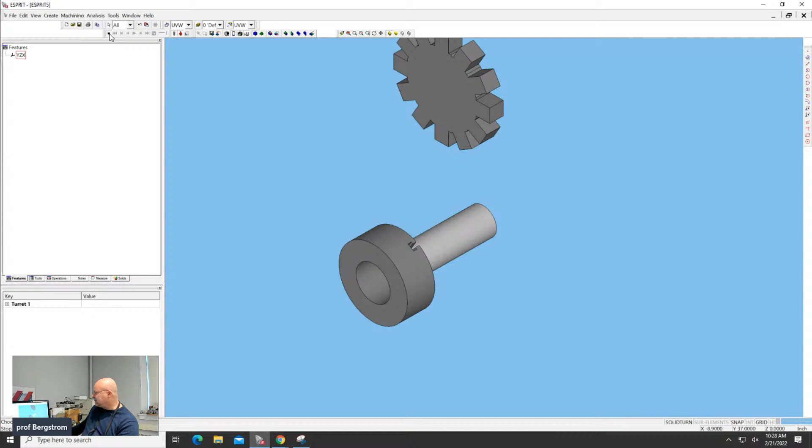Hey, James. This is perfect timing. Step over here because we've gotten to the point of the mill turn training where I have told them how to set up the machine, put their stock in, and set the turret where it needs to be. But they need some help with their part. I was going to look at their part before they asked again, but I didn't. You can come over here and help. Hit stop on simulation. That's their part. Wow. For everybody that doesn't know, this is James. James is a quitter, but he's on vacation today from his other job.

Yeah. It's perfect. I want to just rotate the C axis and do some contours there with a ball end mill. That's what I want to do. Yeah, I can't remember the ESPRIT toolpath that does that. Oh, and you need those little icons changed too. Remember the trick to get the bigger icons? No. Show us how to get the bigger icons. Can we save it and close it? Do you have to save somewhere? No, just save it.

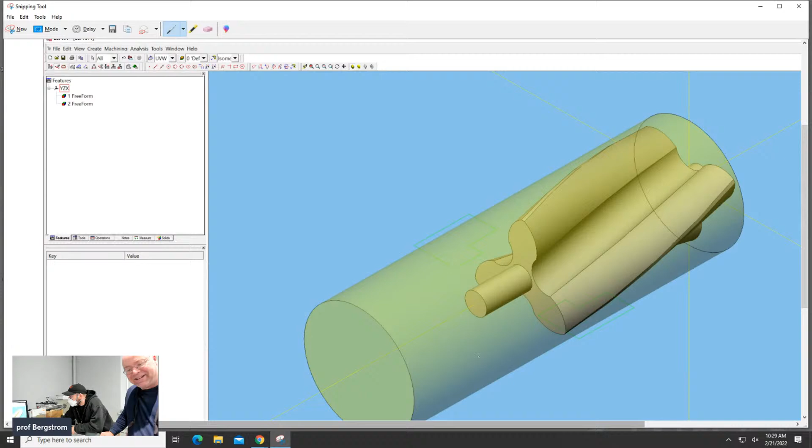Screw 62. I don't know why it's 62. Was that like the 60-second try you guys made to design it? That was the name of the file. Yeah. Oh, it's the 60-second try somebody else made to design it. Yeah. It was like WD-40, right? It was like the 40th attempt. Yeah.

So under compatibility in properties, change high DPI settings, override high DPI scaling behavior, and then system, and then okay. Yeah, system. Fine. That's perfect. We'll just split that out as a separate video now. Because I knew there was a way. There were people here that had that problem, and I said, hey, there's a way to do that, but I don't know what it is. James does. Oh, yeah. Now we can see the icons. All right.

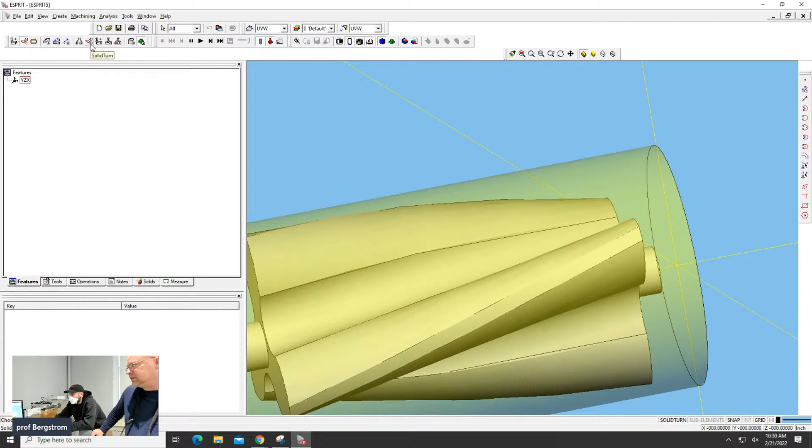So we need to make a tool because we don't have any tools. But let's go ahead and make a tool. This I know how to do. Go to tools. Let's put it here. New, milling tools, ball end mill. What diameter end mill do you guys want to use? I did say the max you should use is 3/8. You don't have to go to the max. 0.25. Were you doing this in the SDK? Ball mill, yeah. Over here we say 0.25.

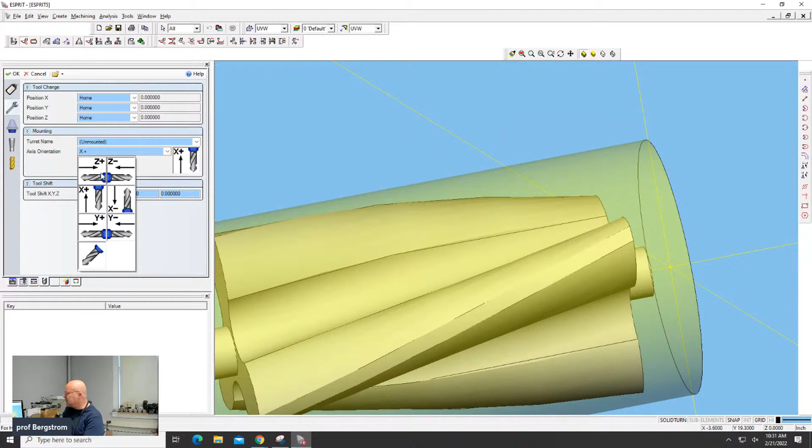And here, this one's important. We need the tool to point the right direction. So it could line up with the z-axis, or it could line up with the x-axis. For this tool, we'd like to rotate the part and have the tool move like this, right? So we want the tool to point at, I think, positive x. I think this is the one we want. And when we create it like that, it shows up out here. Let's move it to station number 1. Now when we hit simulate, ooh, that was pretty long. We're probably not going to use a tool that's that long.

Oh, that's what you were here for? Yeah, drop those off. Key return. We'll leave them there for a few weeks. They turned my email off, but then it's back on. Yeah, because you're an alum. You get emails.

No, but I'm serious. I want to know how to program this toolpath now. Oh, I think I'm doing wrap contouring. That's what I thought too. So how do we make the feature? It's gonna be a chain along one of these edges, like the top surface edge. Yeah, I probably would. The only thing that's gonna be weird is it's a surface, though. You may not be able to get away with it. Don't we have to make the drive chain thing? Yeah, you probably will. So it may not end up being wrap contouring that'll let you do it. Is it wrap pocketing maybe? Yeah.

So I think we've got to make a chain. Do we want to go all the way around or just do one and then rotate? Yeah, I'd probably end up doing one and then rotating around. Me too. So one goes from this edge. All right, so let's make a chain.

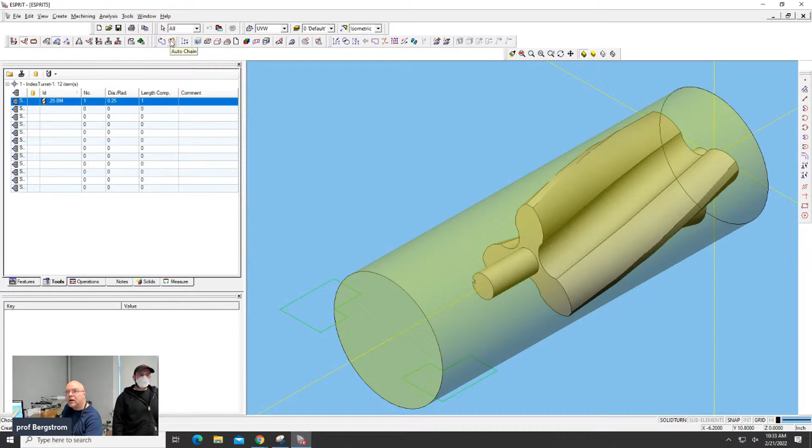Are you just here to drop off keys or are you going to stick around for a while? The family's actually in the car, so we've got to go pick up groceries too. They said you were going to be here today. They didn't say we're going to pass through today. Like, you lift me up this high, and then you just let me fall. Anybody else watch the Daytona 500 last night? Barely. I watched it because I guess I'm a Stewart-Haas Racing fan because of the Haas connection, right? Tony Stewart is in the booth, one of the announcers on Fox. He also owns one of the race teams. And in the last 15, 20 laps, 3 of his cars were in the top 10, and one of them crashed.

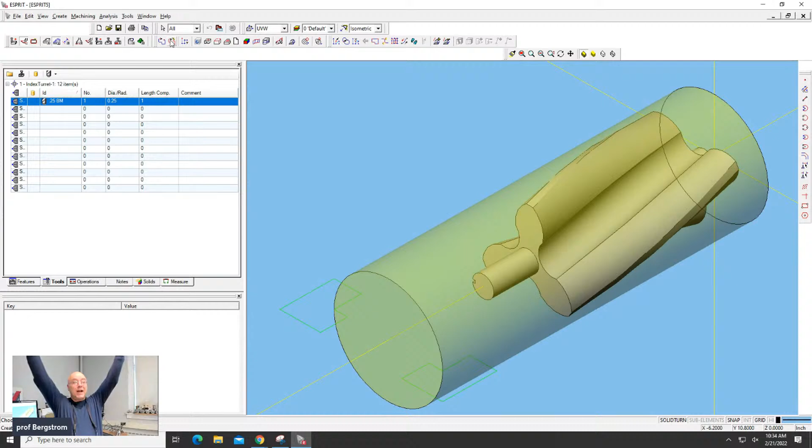And you can hear in the background as the crash is happening, you can hear, "Dang it!" He must have felt like that, right? It's like, I got 3 of my 4 cars in the top 10 at the Daytona 500 in the last laps, right? He must have been rising up, and he's trying to be calm because he's the TV guy. Right?

Yeah, and so here's James. James walks in. I'm like, oh, James is coming. James knows how to do this. He could figure this one out. And then all he does is give me keys and leave. Yeah, I'll take him back. Ian said that there's a letter for me in the office? See? I don't even get to keep the keys.

I was up here. I was like, I'm going to win the Daytona 500. Dang it. All right. You learn to say things like "dang it" in Indiana and Kentucky. I personally learned it in Kentucky. I'm pretty sure Tony learned it in Indiana.

All right. So what James and I think we need to do is a wrap contouring or wrap pocketing operation. It's because it's got the 2 twists. If it was straight, a wrap contour would do it. We could make a chain that defines it and run that across. And it's been 10 years since I've done one of these, but I figured it out that time.

So what I think we should do first is go to this solid mill turn freeform. Not that one. Solid turn wrap, legacy wrap pocketing, legacy wrap contouring. I think because of the double twist, we have to do a pocket. I don't remember how to do that. So I'm going to click on it anyway. Oh, yeah, screw you. I got to pick something. I don't think that'll work, but sure. Yeah, incompatible.

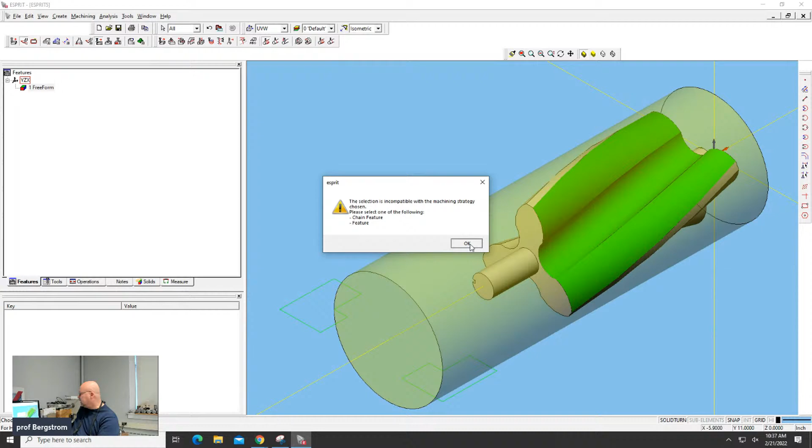Okay. So now features. Now I've got this freeform feature. I don't think it works with the legacy thing though. Yeah, incompatible. Because that legacy wrap pocketing, it wants us to have a chain that drives the feature along there. I'm sure that if we go out to the solid mill turn one,

Oh, 3D contouring operation, concentric finishing. I don't know. 3D contouring operation. That sounds cool. So I've never done this one before. I never clicked this button before. It's got to have a chance though, right? Well, hey, it accepted our feature. We're going to use that tool.

Before you run it in the machine, you're going to have to know things like feed, speed, depth of cut, but I just want to know if it makes a toolpath that's sort of the shape I want before I bother to worry about those things. Toolpath profiles. So I'm thinking that we can define a chain that tells it what direction to move the tool. And so we may need to do that before this will work right.

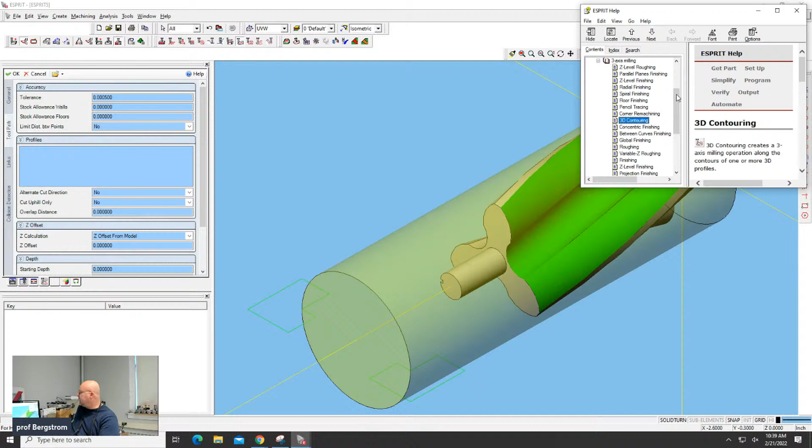But here's what I really wanted to do. I really wanted to open up one of these features or operations so that we could click on the context sensitive help. The thing is, who's ever read the help thing for software before? Who thinks that software help files suck? Yeah, the ESPRIT guys never got that memo. I have learned how to do so much stuff in ESPRIT simply by opening up the operation and clicking the help thing. And then it actually brings you to, hey, 3D contouring. Well, that's cool.

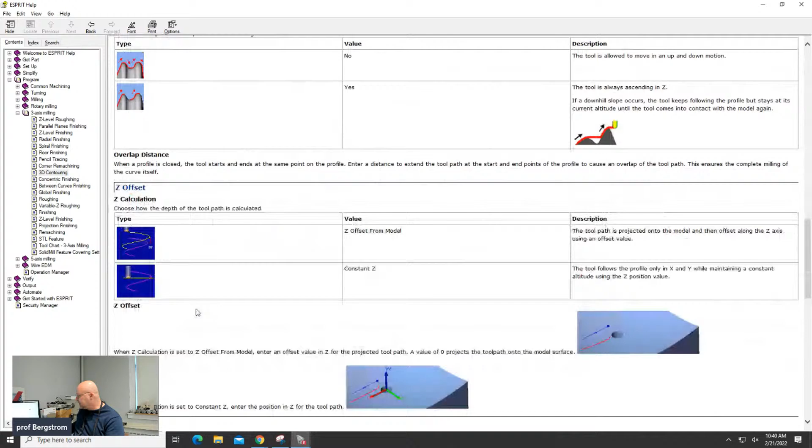And so setup and all these things, like, wait, here's the general tab. So it tells you all the things on the general tab and what they mean. Here's the toolpath tab. So it tells you about these things in the toolpath tab. Oh, that looks pretty cool. I do think we're going to need some kind of a chain to tell it to drive along the surface there. But it's getting us in the right direction. So it tells you what all the different things mean. But reading is way overrated. I'm just going to click OK and see what happens.

Invalid profile. Yeah, because we didn't pick a profile. So we got to make a profile before we can do this. So cancel. I'm going to hit your part here, copy, right click. Do I want to do that? Smash. Sure. Did that make... Now I want to have highlight turned on. Yeah, so that made a line.

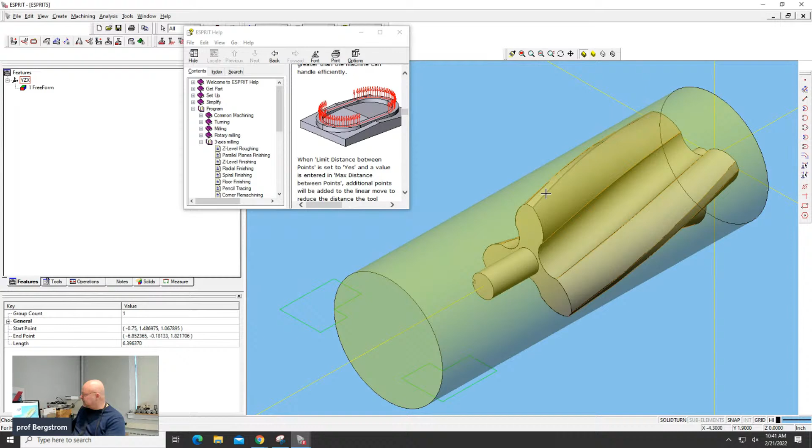Sometimes when you do the smash, it makes a bunch of line segments. That isn't what I wanted. I wanted to make a nice solid arc. So at least it interpreted that as a nice solid arc. So I got that selected. I'm going to create an auto chain on that. And so now it made a chain on that profile I liked. I'm going to do the same thing for this one.

And auto chain. We may need to make a chain that encloses that whole thing. Actually, if we do that, the wrap pocketing thing might also work. So we can do that after we're done with this try. But I've got those two chains. I got my freeform.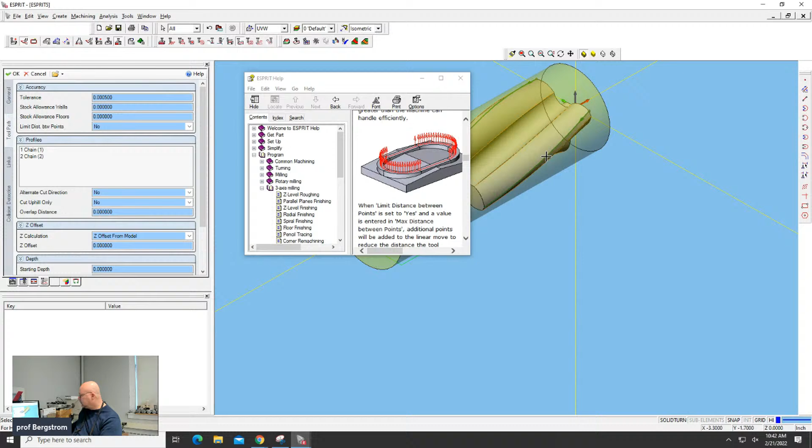Go back over here to, which one was I trying? This one, 3-axis milling operation. Profiles. Yeah. Well, hey, that did something. It doesn't look like it did anything good, but it did something. Oh, it did something. And it crashed going between the two chains. But that's a start, right?

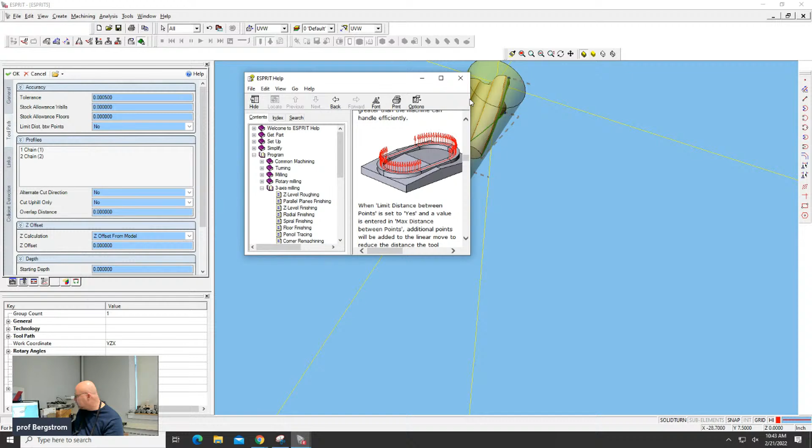So hit stop. Maybe we need to give it depth or something. We didn't look at most of the options. Toolpath general. I said read the help, but let's just try. All right, so cancel. I'm gonna go ahead and delete that. We didn't invest too much time in that one. Let's make a chain that defines one of these pockety things, right? So we're going to do an auto chain.

Now remember, I already did the smash, so I have geometry that shows all the outlines of the feature here. You can't do this unless you already did the smash. I'm going to start at this spot right here. So I'm connected to that endpoint. And it's asking, choose next element. So what it wants to know is, what's the next line segment you want this to follow?

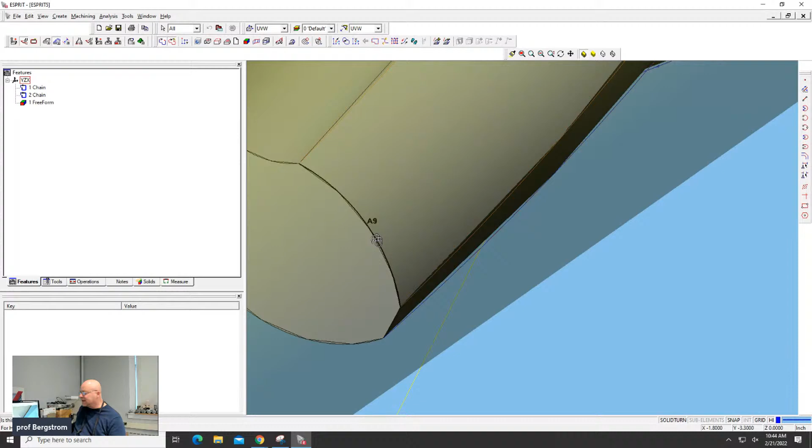If you find the middle of a line segment and you see the endpoint thing and you happen to click at that moment, it's going to tell you, I didn't ask for a point, I asked for a line segment. It's going to fail. But if I click anywhere on that line segment that's not there, it's going to say, did you mean this one? I'm going to say yes. And so now it's saying pick the ending element.

Well, I could pick the start point again, and it might ask me what path do you want to take around the part that's connected by lines. If it was a simple geometry, I probably would do that, but there's too many options for it to pick from here. So instead, I'm going to come up to this point. I just wanted to follow that contour up to this point. Oh, come on, don't say that. All right, so I'll pick this endpoint. And it's picked that one.

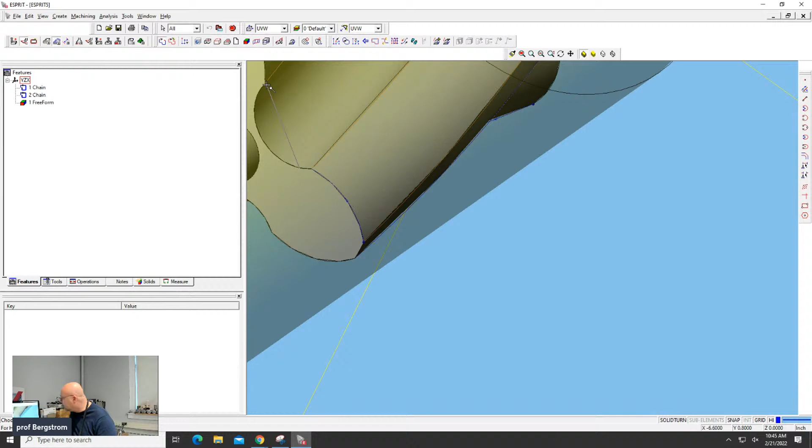Now it's saying choose next element. I'm going to pick this one and this endpoint. So I'm going to do it manually for all of them. And I want to go to the other end now. Oh, no, no. Choose next element. I want it to be the line. Then to the end. This element to that point. This element to that point. This element to that point. And this element to that point. So now it made a chain.

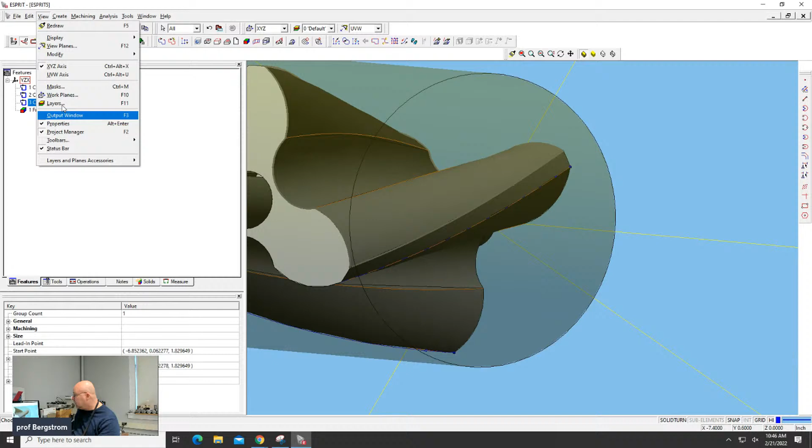If we go to view, masks, turn off the solid, turn off the lathe stock, turn off the geometry. Sometimes you need geometry for stuff, but it's a pain when it's in the way and you can't see what's going on. And let's turn off that other toolpath. I thought I deleted it. It must be the freeform feature it's showing us. Anyway. So that's a chain that defines the edge of what we want it to do.

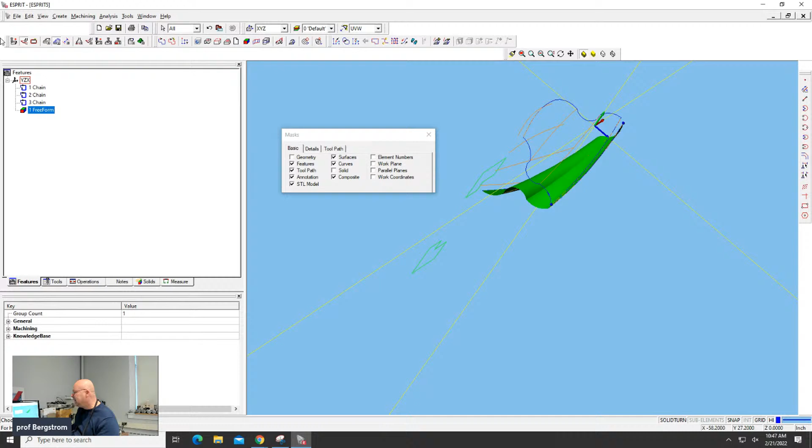Let's try that chain now. Let's do our freeform feature. Oh, but I didn't define the chain on the same spot as the feature, right? Let's delete that freeform feature. Let's delete that chain. I'm just deleting this stuff. Oh, that's all geometry or something? I don't know what it is. I'm just deleting stuff I don't want to look at.

All right, so now we just have that one chain that we can see. Turn back on the solid. So our solid is now under the chain. Let's create a freeform feature that's in between that chain. Create features, freeform feature, part, this. Okay, so now we've got that freeform feature and we've got a chain that bounds it.

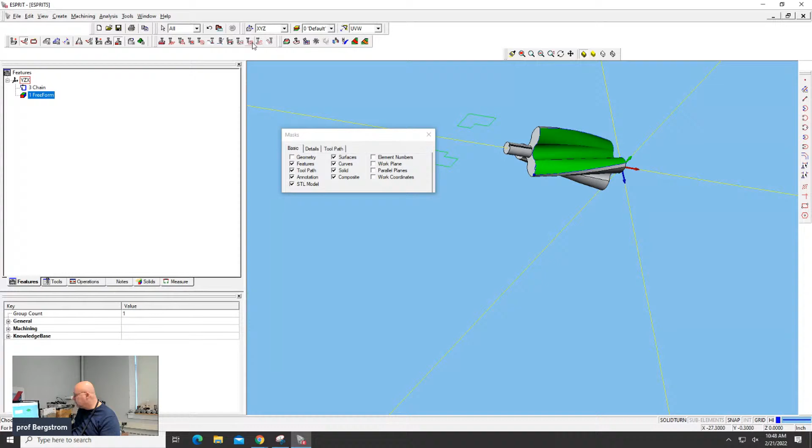Now let's go over here, try that 3D contouring operation. Select the freeform, try our 3D contouring operation. And cancel. Did I? Freeform feature. Profiles. That's different from what I did before. Still not quite what we wanted.

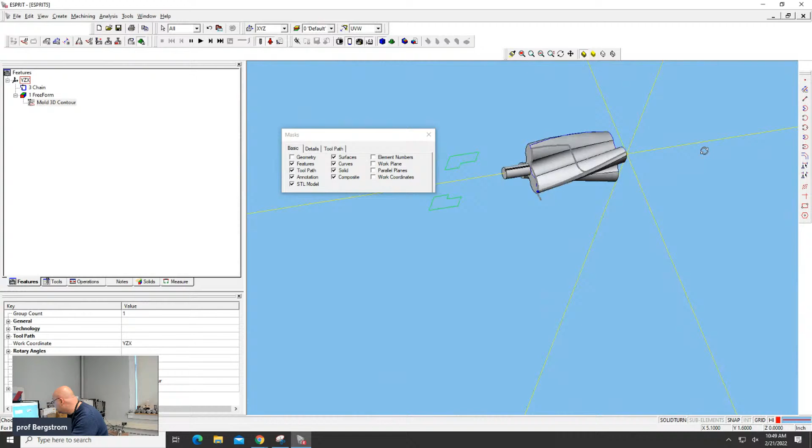Huh. We should probably take a little time to read the help. But sometimes just trying it is fun. I select this one and I go back over here to my legacy wrap pocketing.

I may have to give it some depth. Let's, no. See, but I think the problem there is that it didn't like the plane that the chain was on, or the side that it was cutting on. It was trying to put the tip of the tool just outside this edge of the chain. So I'm going to look at my definition here under machining. It's trying to cut, yeah, it's not trying to cut the thing I wanted it to cut. So machining cut side center. So it doesn't see the chain the way I intended for it to see the chain, right?

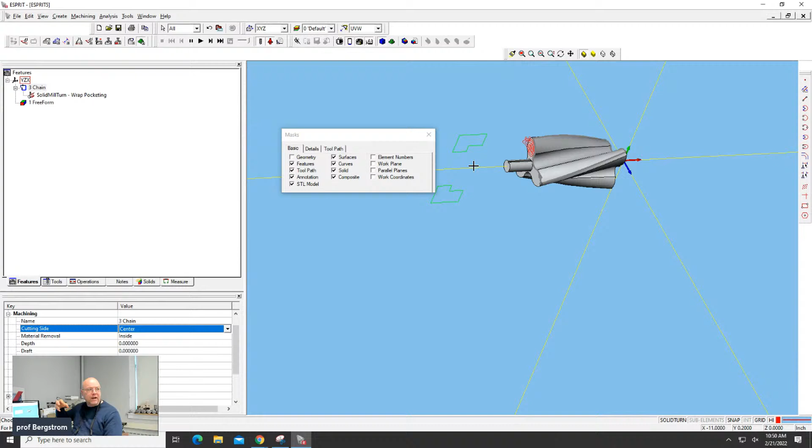Oh, but it does open up. So I can get here and I can click help. Now I could have just opened up the help and searched for it, but I really like the context sensitive help. So legacy wrap pocketing. Let's see what they tell us how to do this, right? So they made a chain that went around something. So introduction to legacy wrap pocketing.

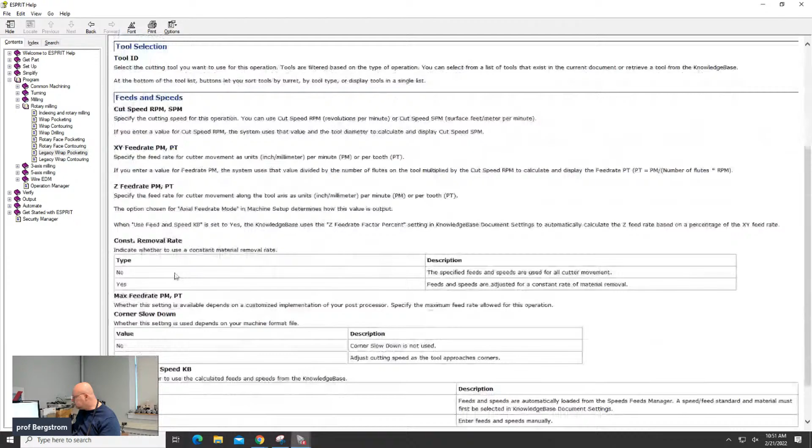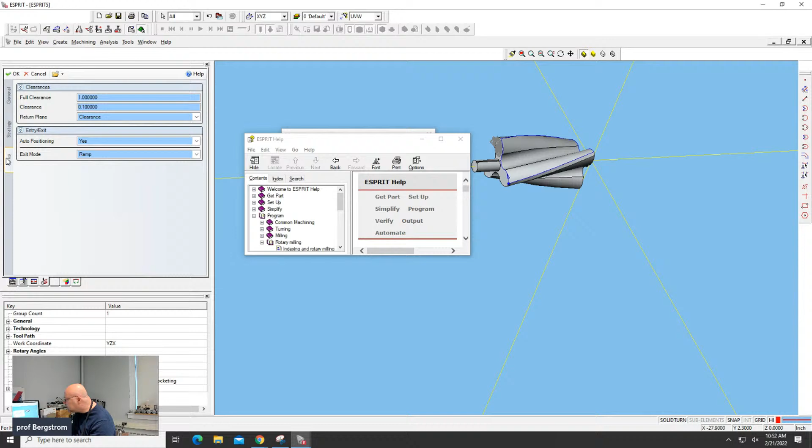All right. This stuff is what we think it is, strategy. OD. Escape. Go back over here. Move this up here. Strategy. All right, general. Wrap pocketing. Yep. Let's try.

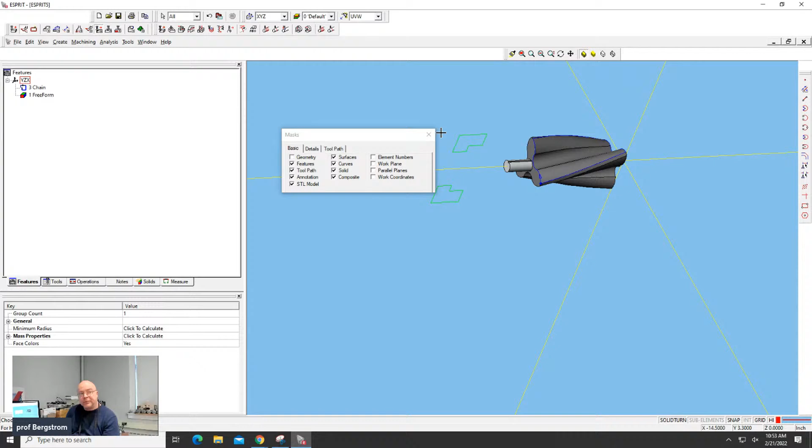So it's going to be one of those. And what I would do is go through and read the help and check those things. You're going to want to make sure your tool's pointed in the right direction. Those are the things that'll come up, is whether the tool's pointed in the right direction. And if I dig for it, I'll find a PDF that I can send you. You emailed me the file, right? So I can reply to the email with the file and I can send you a PDF that shows how to set this operation up.

It's just that it was 10 years ago the last time I did it, and it took me like a week to figure it out the first time. It could take me a week to figure it out this time too. But hey, James's email's turned back on. James could figure it out quicker than a week. Because for the whole time James worked here, when one of these things had to get done, I just said, hey, James, you do it. And that works right up until all of the staff quits.

No, but he just gave me the keys. I thought he was like coming to visit. Left his family in the car. He should have brought his family in to see us, right? A lot of sharp stuff out there, though. I know he's got like little kids. When my kids were younger than his, they used to run around and play in here. My daughter, when she was really little, she would walk around our machine shop and she would pick stuff up and say, Daddy, I found some sharp stuff, like chips and fasteners and whatnot.